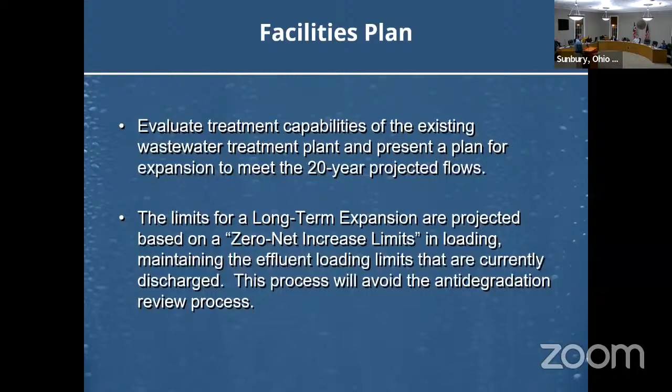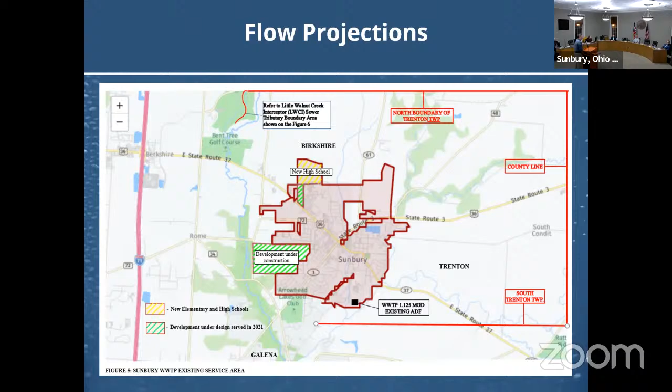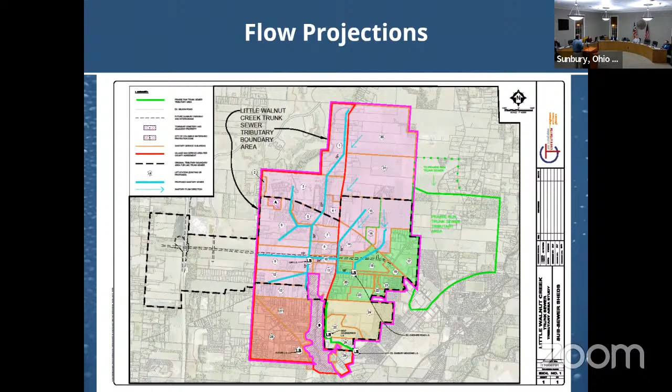Just showing you one of the first important things we did in our facilities plan. This is a very high level version of it - the full facility plan is like 80 pages long. We're looking at different service areas, trying to project how much flow you're going to have over the next 20 years. This is most of your existing area, plus the Little Walnut Creek sewer drainage area. We're looking at where you have to expand and how much flow that can be.

So the other thing we look at is population projections. These are from Delaware County Planning Commission - we did not come up with these ourselves, but we did use them. They show somewhere in the neighborhood of about 3% growth throughout.

That's important as we look forward to what's going to happen 20 years from now. Notice these numbers also project what it's going to be like in 20 years here - I believe they're expecting about 11,500 people from about 6,600 currently, up to about 11,500 in about 20 years. So that's what they're expecting, and that's what we used for our projections instead of trying to redo them ourselves.

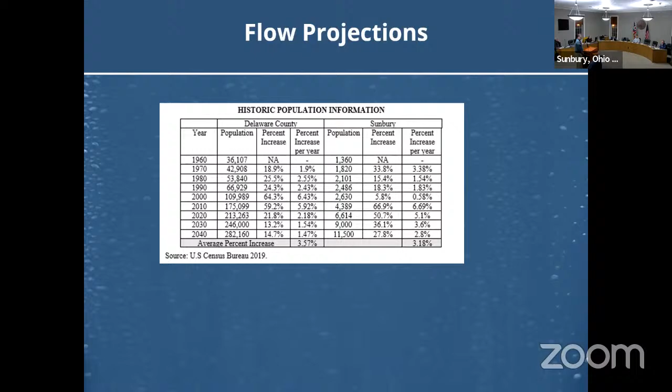So what we did to help project what the wastewater plant flow would be like is we looked at the current per capita - how much flow is hitting the plant divided by your current population. That works out to about 126 gallons per day per person. For planning purposes, we used 130.

So there are some assumptions made in this. I'll mention that if the commercial or industrial went up or down not in proportion with your population, then that per capita number - because it includes commercial, industrial, and all those things - could drop. We just have to make the best estimates we can.

So then that works out - we looked at the population from that previous graph and worked out that your average current plant capacity is about 1.125 MGD, meaning 1.125 million gallons per day it can treat. By 2040 it needs to be about 2, on average, based on that population projection for the most part.

And then the wet weather number down there - when working on treatment plants, we have to worry about the average, but also about peak flows, like hourly peaks you get from a rain event. Those go up as well, from 5.2 to about 7.2. Those mean short-term amounts of flow it can keep up with, but it can't do that all day long. You get the idea.

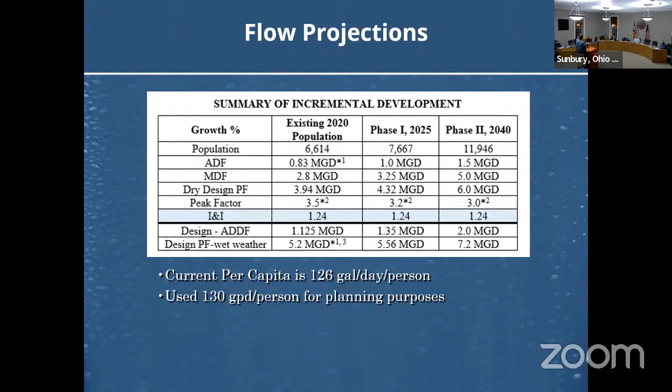And then we have 3 phases we planned out. One is the one we're designing right now - we'll talk about that in a few minutes towards the end. Phase 1 is actually going to have to happen pretty soon - that's where we expand to 1.35. And then we also have a phase 2 that's a little farther in the future, more ready for that 20-year horizon, listing the things that are going to happen on those particular processes.

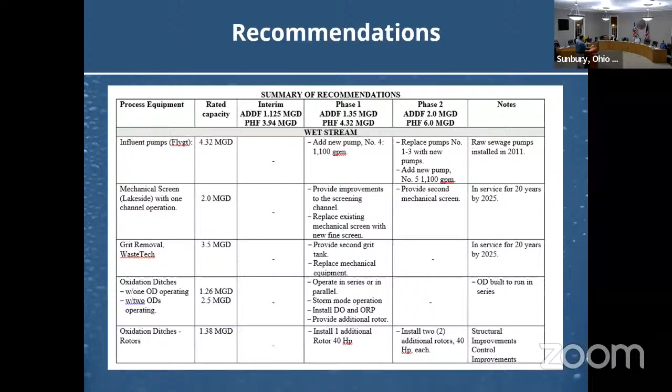We're not recommending at this point any major changes in technologies and those kinds of things overall, which is great. So Dale and company aren't going to have to learn anything new - the plant was really designed for a lot of expansion already, and we're just doing those next steps that are pretty much already built in. Fortunately, that's all working out very well.

Go ahead and do the next slide - and this is just the rest of it.

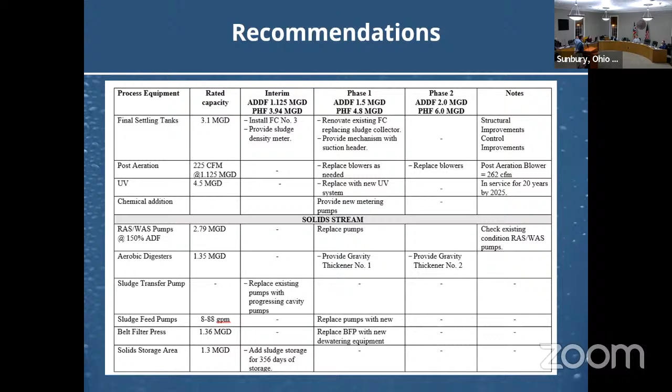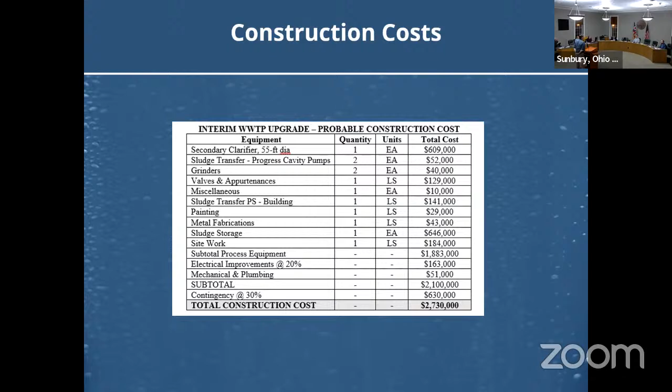Thank you, Dave. Why don't you go ahead and we'll see the rest. Phase 1 is where we're actually going to expand the plant - this is where it goes up to 1.35, whatever that number is, and that's the largest phase, a little under 5 million, trying to project out. We'll talk about schedule in a second. One of the things we're doing with this, besides upsizing everything that needs upsizing to handle bigger flows, is also keeping in mind end of life of a lot of equipment at the same time.

So it's partially an asset management thing. A lot of them are getting bigger anyways, but we're also aware of things that are going to be at the end of their lives. Does that make sense? Yeah, we make sure they get replaced and taken care of.

I had mentioned to these gentlemen earlier that the wastewater treatment plant is one of our biggest line items, in terms of fee, but also debt burden and things of that nature. When a pump goes out here, it's on the low end a $35,000 pump, on the high end a $100,000 pump.

I'll tell you, our team that works there, the 2, now 3, they're as efficient as you can possibly be with both their time and the city's money. So they are very frugal, but we appreciate you taking a look at inventory management, asset management, things like that, because anytime you're in a rush to buy something, the price goes up because the demand is extremely high.

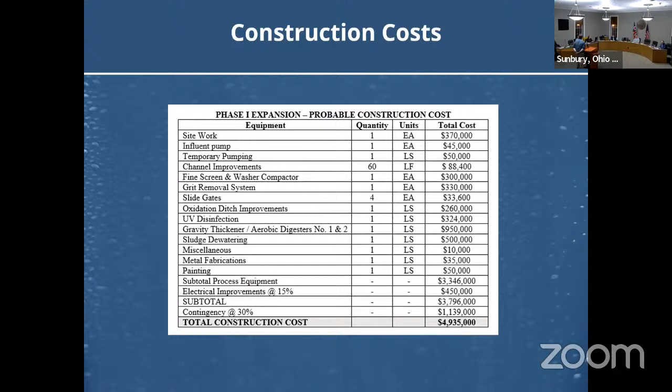Yeah, great point. Let's go to the next slide, and I have a couple comments about costs in general. This one is the final expansion. We get up to 2 MGD on an average day. There's actually not as much to do at that point, it kind of hits a peak in the middle there. As we do everything, all of it is sized for 2 MGD. If we put something in the first phase, it's sized for 2, which makes sense. So a lot of phase 1 is also kind of part of phase 2 as well.

I'll just call out one more thing. So phase 1, it may be 66% of the cost, and you only get a 20% lift on your capacity. But what Dan's saying here is they're not just incrementally going to get that rate of return. The reason phase 2 is what it is, is because all the things you upgraded in phase 1, you can't really do 2 before you do 1. Phase 1 is to put the big items in, and then phase 2 is really where you get the return on the upgrade of the capacity.

I'll just mention this because I think it's important, especially as we look to start. We're going to be looking at bidding soon. This first phase we call interim, mostly to keep everyone straight between the other phases.

The bidding environment right now, I don't know if you guys bid anything building or vertical related recently. We did our best with these estimates. I'm not saying we shouldn't trust them, but contractors are having a hard time putting bids together because costs are changing so much right now, and delivery times are ridiculous. We're all seeing supply chain issues, but a pump is 6 months, generators are a year. And I forgot that there are actually 3 generators in this first interim phase at the lift stations.

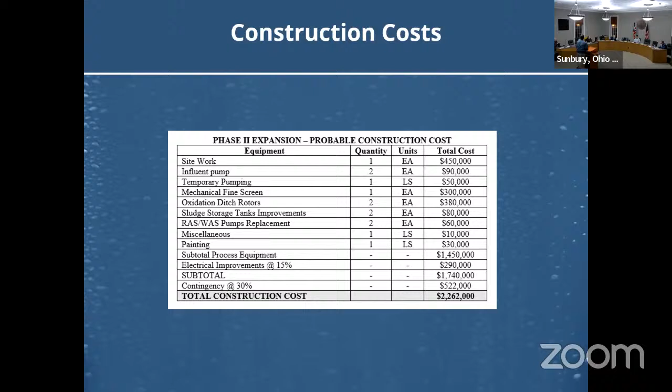So phase 2 is definitely farther off. What we say in the facilities plan is, I believe when you get to 80% of the 1.2 MGD average day flow, that's about when you start thinking about that phase, and that's a ways off. So just to understand — looking at the different costs over the period of time, I did rough math, about 10 million until 2040 is about what the cost of these projects will be. Yes.

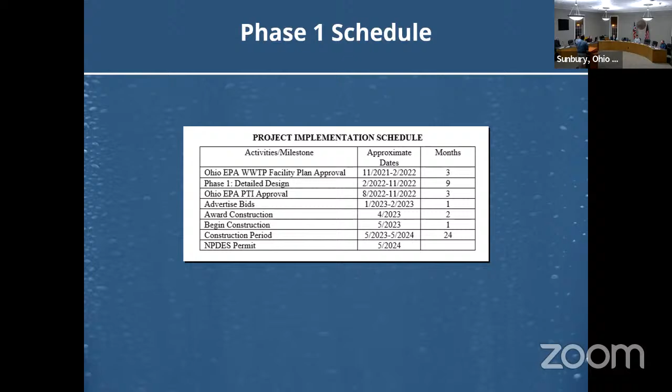Just the last one of my slides, and I'll get out of your way. The facilities plan has been submitted to EPA - a lot more complicated than what you guys are seeing there. It's being reviewed and approved. It was approved in terms of the interim project. What that means is they look at it long enough to say what you're planning to do with the clarifier and all that makes sense.

And then EPA decided later that it needed to be sent to other people. I don't know why they did it this way, but unfortunately they're in charge of this part. So the engineering staff who are reviewing the design of the interim project are the ones who've seen the facilities plan so far. I kept asking them, you've got to review it, and they eventually agreed, and then they sent it to a different group of people. That review is happening right now - I've not heard anything from them. That group is more looking at phase 1 and 2. Does that make sense?

Long term, the other thing they're trying to look at is how your wastewater plans are fitting in with Galena and Delaware County and anyone else in that direction. One of the important things with any of these projects is they don't want to loan money to two parties covering the same service area. So they want to make sure you're all playing nice together.

I don't think there's any issues, but that's the kind of stuff we're reviewing right now. I know we already have agreements in Delaware County and all that, so most of it's already figured out.

They also mentioned that the interim drawings have been through them, and they've given us comments back, and we've given the stuff back to them. Now we're just waiting for them to finish up their reviews on that, so hopefully that will be soon. Waiting on more, whether they either approve it or just have more comments from EPA. This is on the interim design.

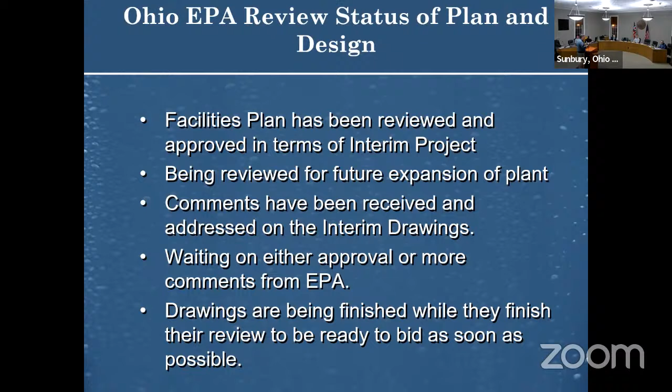And while that's happening, we're finishing things they don't review, like architecture, structural, electrical. We're finishing those while we wait. So we'll hopefully be ready to bid as soon as they get done, depends on their comments, that kind of thing.

And the project was submitted for renomination for the priority list with Ohio EPA, and it was accepted. So as soon as we're ready, as soon as we have a PTI and constructible plans, we'll submit with council's direction to Ohio EPA for a loan.

It was really low interest when we first started this, and I'm sure it's still fairly low, but probably not quite as low. It was less than 2 percent, I believe, when we started this.

It'll be interesting too. This is actually an argument for getting the design started on phase 1. We mentioned timing-wise you need to be thinking about it hard already, but all the stimulus money out there - the more ready you are, the farther along you are, the more you can take advantage of opportunities that stimulus money kind of pops up.

Various people find money and all that, and there's been a lot of rounds of it already. There's theoretically more coming. No one really knows exactly how that's working, or when, but the more ready you are, the more chance you have of getting it, whether that's low interest stuff or even free grant money.

Yeah, our favorite term, shovel ready. So if you're shovel ready, you go to the front of the line. Even showing the facilities plan getting in and getting approved shows you're serious, and that'll help. So the farther along you can be, the better.

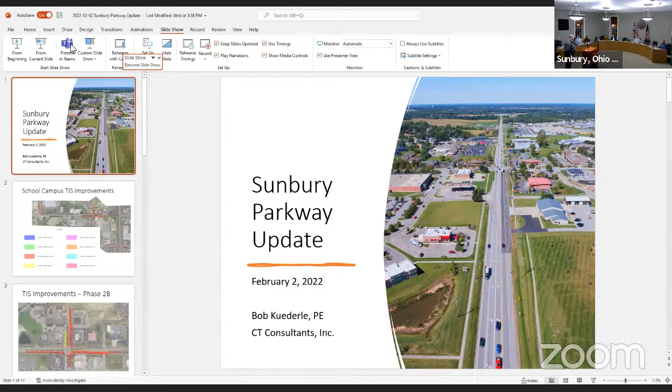All right, we're on to the next item on the agenda, and we have roadway improvements, primarily generated from the new high school traffic impact study, also tying in Sunbury Parkway items. And we have Mr. Bob Kuederle, our own Sunbury resident, Bob Kuederle from CT Consultants, head transportation engineer. Glad to have you, thank you again for pulling this together.

That wastewater planning effort was at the end, and we're going to build stuff and it's going to be cool. The roadway planning effort is at the very beginning, so we're going to be talking a lot more in generalities here on the roadways. A couple of you guys are maybe a little more new to the material, so we'll kind of start from the beginning and go forward.

I'm going to walk over here because I like to point. So one of the things that got us started with this was the school project. High school's open, we thought it was going to be a mess - it works, right? The school isn't at capacity. Every year we're going to add students, and that's going to kind of amp up what's going on.

So the first thing we did in our office to look at roadway planning - this is Cherry Street coming into Sunbury, that's State Route 37. It doesn't matter what it is from far away. The colors are the projects that were in the traffic impact study done for the elementary school and high school. So the first thing we did was draw them all up, see what they look like, see what they cost, and see what we think about them.

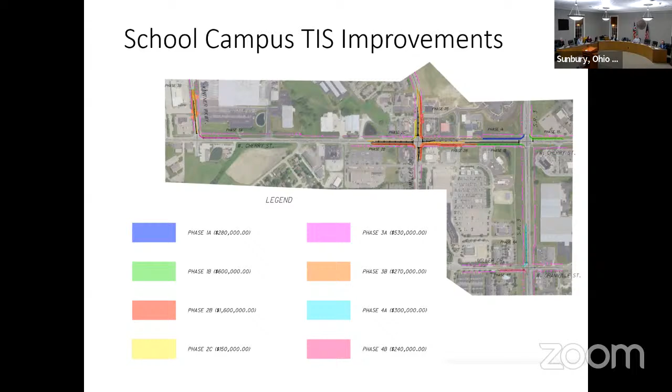So this was all of them, all over the map. Add these numbers up, it's about $4 million - without right of way, without soft costs, that's just construction costs. Real quick for context, 3 years ago they were like $2.75 million, and those were high-level estimates. This is a little bit more granular, and I think Bob and his team have done a really good job analyzing to the level where we can start making some baseline decisions.

So yeah, the challenge is what do we build and when, right? How do we phase this in? That makes sense. Pretty clearly right out of the gate, the intersection of Miller Drive and Cherry is probably where we're going to feel the most pain already, and the place to start.

So we're kind of zoomed in here, and these estimates now we've actually drawn up to scale so we can measure things. It's coming a little more clear, right? So this is Cherry and Miller, and it's pretty big improvements to go dual lefts into Miller Drive.

And we all know what this feels like - Miller Drive doesn't have lanes to take dual lefts into it, right? So we've got to build them. We're also dual lefts coming out, so at the end of the day the high school's dumping out dual lefts back out onto Cherry. Again, red over here is adding through lanes to catch those.

And then this one's interesting too, coming in from the west. We want dual lefts, and we also want dual throughs, because when we have 2 through lanes, we get twice as much green time through our signal. So now we're widening all over the place, and we're whacking the traffic signal all the way around, at probably all 4 corners. And if we were going to design this improvement to build right now, we'd want to look at the full build of this thing, because the last thing we want to do is build a new traffic signal and then have to build another new traffic signal.

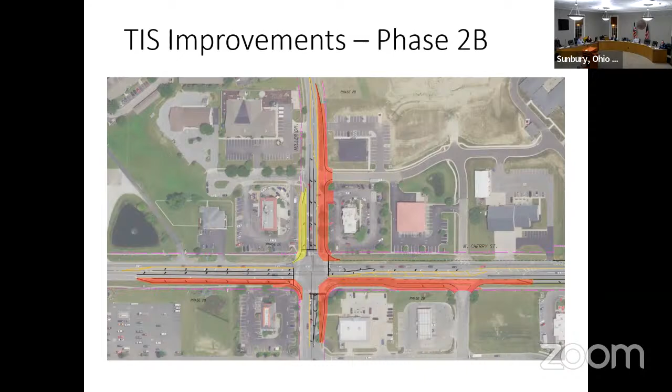Real quick, if you've been down to Easton, you can maybe tell they didn't add subsequent lanes, but they put in the right signal heights and made the right of way the right width initially. And as growth occurred, they've added additional lanes in there. To Bob's point, we don't want to piecemeal this, that's why we're looking at it comprehensively. Yeah, we don't want to put the signal pole right here and then need it to be back here, where we had more lanes. Some of the yellow and red here is not existing right of way, and that's the slide.

Okay, so thank you. So what do we need to build? What does it cost? How do we like it, right?

So McDonald's and Wendy's, in order to get all these lanes in here that were in the traffic impact study, we are going from the edge of pavement of Wendy's parking lot, retaining wall, sidewalk, curb, a bunch of lanes, curb, sidewalk, McDonald's parking lot. So from building to building, it is pavement all the way across to fill all those lanes in there. We're outside the right of way. It's not an insignificant thing, right? So we want to make sure if we were going to commit to going down this road, we want to be really sure that this is a long-term solution.

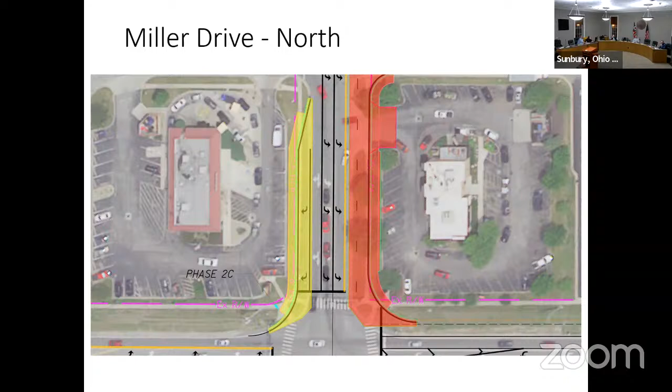Just to kind of zoom in on the north, it's a little funky in here because of the location of this intersection being close. We've got a short turn lane now, and we've got this turn lane that kind of comes over, goes in, and then continues. The improvements from the school TIS on this approach really only have widening to go to another through lane, so the traffic coming up Miller can pump through this intersection faster through the signal, and because we've got dual receiving lanes on the other side. But now we're going from 3 lanes here, there were still 3 here with this median thing. Now, poof, we're 5. So that would take this area from a little bit funky to a lot more funky. That's the kind of thing we're looking at with the level of planning we're doing now.

What else about this study? So this was a traffic impact study for school buildings, executed the same way we do a developer study. A couple of things - you might feel like, hey, I'm looking at this intersection, I kind of expect more improvements on the south side. The school study was built around school operating hours. High school gets out at 2:30 in the afternoon, and in the morning the schools are kind of loading during the AM peak hours. So the school study's a pretty good gauge on the morning, but the afternoon has got the school peak at 2:30, and we've got our evening peak at 4:30, 5:30. So that's the thing where we could be missing whole improvements because we don't have those hours.

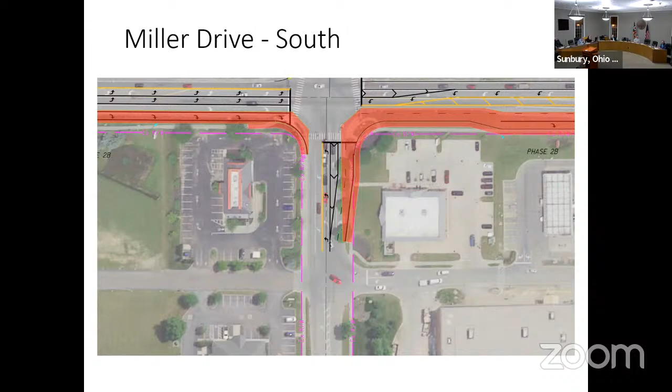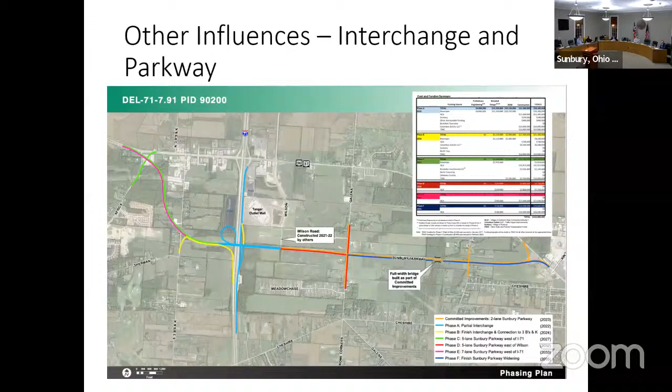And in addition to just the additional development, Joe, you were talking about rooftops. We've got our industrial park. We've also got some roadway connections that will have an impact on what we do at Miller, at least, right?

So right now, to get to the industrial park school site, Kintner Parkway and Miller Drive, that's it, two ways in. If this thoroughfare plan builds itself out a little bit more, we've also got a west connection into the industrial park that somehow gets to 36, 37. And we've also got a punch through to 61 in the east.

Now, I know that was studied in the school TIS, and it was an either-or. And I would agree that we're never going to force the traffic inside the school site to go where we want it to go, because we just can't do that. But bringing those other two connections online may reduce the craziness at Miller, which would be a good thing.

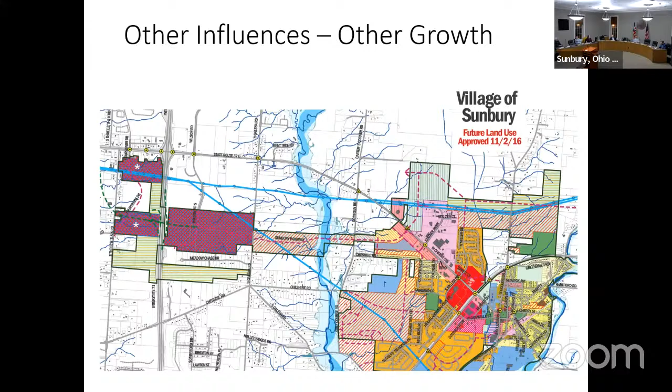We can go to the next slide. So we're just getting started on this right now.

What we want to do is first build ourselves an updated picture of what the traffic looks like based on what we understand is really going to happen. We've got the interchange in Sunbury Parkway coming in, we've got the school campus, we know what the traffic is from the school, we've got the other development and growth, which one of the most fast-growing communities is not going to want to neglect, and we've got these two potential other connections.

If we could see the whole package, and we understand that some of these impacts are directly related to the interchange and the federally funded project to the west, we could favorably position this for outside funding rather than 500 for a turn lane, 500 for a turn lane, and then it's all gone. And we don't really have the nucleus of a big planning effort like we did with the wastewater.

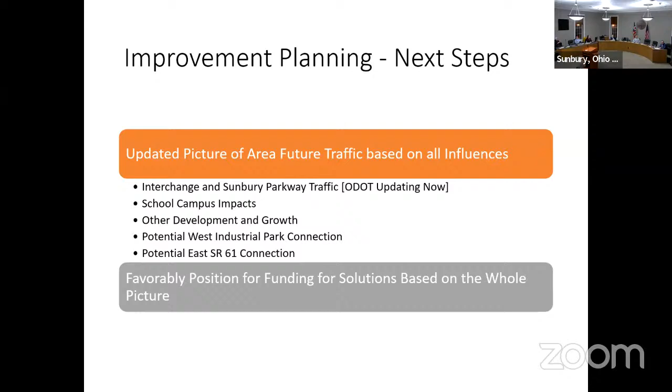Kintner Parkway, existing signal, that's a big one on everybody's radar. The school study didn't touch on Cheshire Road, but I think it needs fixed. It needs something, or we at least need to know what we're doing to it, because if we make that dysfunctional, that's the way into the middle school that doesn't go through Fairland Drive. So that's a link that we need to look at.

And then these are the biggies. Up 61 is not a big deal. I think we've got existing congestion at 61 and Route 3 in the peak hours. Maybe some of that can be fixed with signal retiming, but these are kind of long-term, the biggies.

Yeah, I think you asked for feedback at the beginning. I totally agree with the scope of what we're looking at here, even with the two dots that are not signalized today whatsoever - that's the State Route 61 northern one, and then also the future Sunbury Parkway connection near Tim Newman's property on 37. And I agree with you, it's not fully baked.

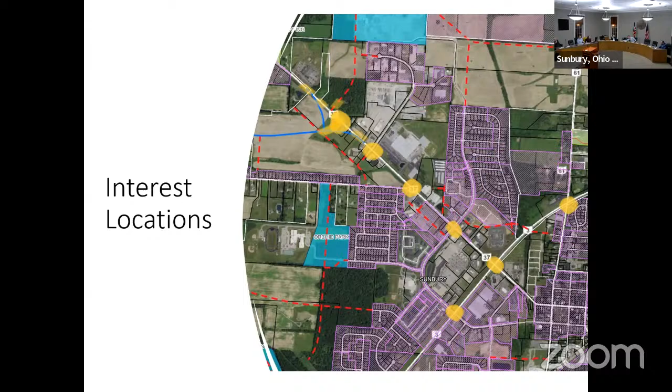Anything else on this map before we go to the next one? Okay, we'll go. Any questions, John or Murray? Yeah, you guys can drop in anytime.

This thing that's bigger, I blew it up so that we don't all have to squint.

We're on track for $10 million worth of TRAC funding and $21.9 million of local funding, so that's a pretty heavily weighted local. And this all requires TIF money from a developer project at the interchange as a seed to get it all going.

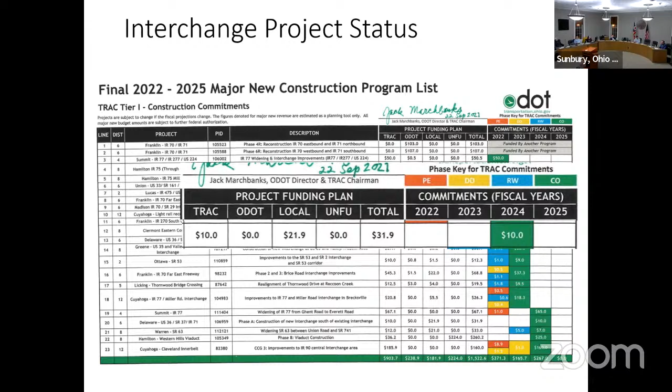So we can go to the next slide. Where we are is ODOT has said to us they're updating the environmental and the traffic numbers. We don't know how we're doing that yet. Once they make up their mind and let us know, we'll absorb their traffic numbers into ours and then we go. I don't want to get ahead of them and then have to redo our work and waste time. So that's how we kind of stack up schedule-wise with ODOT.

We'll need to do a little bit of data collection to get going, but most of the traffic volumes we have from one source or another are pretty easy to get. Something I didn't put in there, low-hanging fruit with the school impacts, is I don't think we've done anything to look at the traffic signal timings since the schools have turned on. So it's probably time to do that. We could do maybe some time-of-day programming around 2:30 that would help clear it out at the end of the day and pump them in the morning. So we'll be looking at that in the short term.

One other thing, we're going to hear from the police later. We have Officer Whiteside, our newest Big Walnut Local School District school resource officer.

He's done comprehensive journaling every single day of the traffic impact, but more importantly, we have all the data elements, David. We have all the traffic counts from the radar signs, which I think is just a good data point.